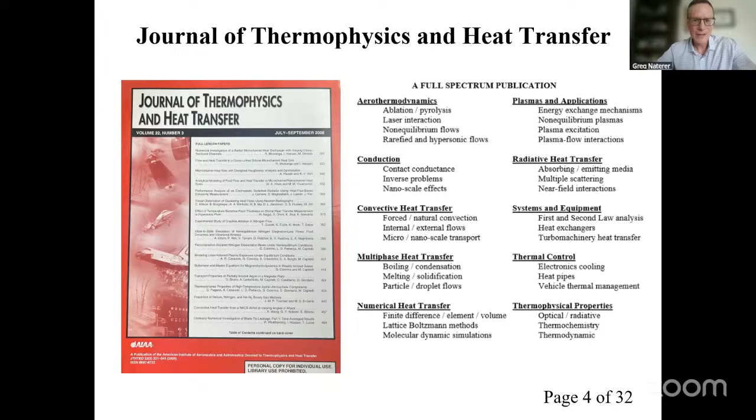Okay, moving on to hydrogen. Hydrogen is a promising clean energy carrier of the future and a potentially major solution to the world's problems of climate change and greenhouse gas warming. It can be produced in a clean manner, and when done so, its combustion produces no CO2, just water vapor.

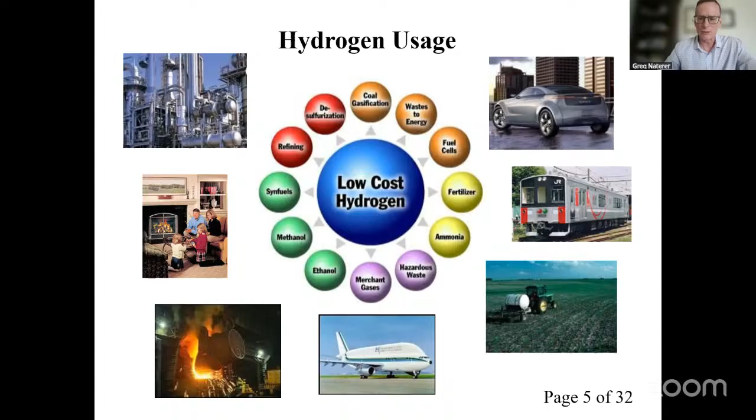So how is hydrogen produced in the world today? Hydrogen doesn't exist naturally in nature the way fossil fuels do, so it needs to be produced or manufactured somehow.

What are the primary sources of hydrogen? Well, there's two. One is that hydrogen is contained within fossil fuels like natural gas, coal, and others, so one of the primary technologies in the world now for producing hydrogen is reformation of fossil fuels like natural gas.

That accounts for 96% of hydrogen production in the world, but it has some disadvantages, including air pollution, CO2 emissions, and the potential future of increasing carbon taxes and the costs of sequestration.

Another alternative is electrolysis, which produces hydrogen instead from water. There's an abundance of water that we have, but a disadvantage with electrolysis is that it has lower efficiency and higher costs because it's using electricity to split the water.

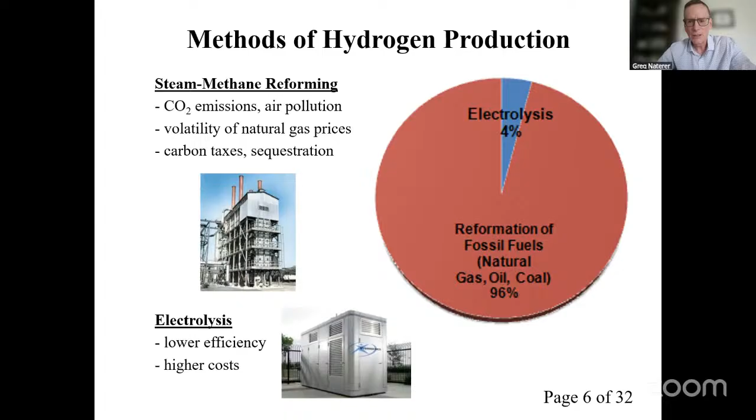Are there any other alternatives that are promising at large scale and lower costs? Well, potentially. I'm going to go through some slides quickly here on some research that myself and my team have done over the years. If you have any questions as we go along, please don't hesitate to interrupt.

Solar energy with the use of photocatalysts and water is a promising technology being developed at the laboratory scale. Essentially, photocatalysts, which are like nanoparticles immersed in water, can absorb sunlight and through that absorption process generate a reaction that splits the water into hydrogen and oxygen.

I'm working from home today, so I apologize if you hear a dog barking in the background. He's been misbehaving lately, so just please ignore that.

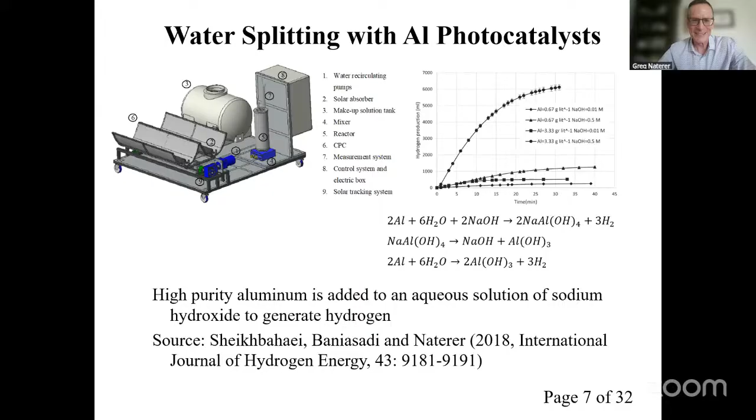Another method of water splitting is thermochemical processes. If we consider splitting water to produce hydrogen and oxygen directly, it requires very high temperatures, thousands of degrees Celsius, which is impractical, difficult to obtain such high temperature heat sources, and rather inefficient. So another promising technology is the use of intermediate chemical compounds that reduce the temperature and can split the water at low temperatures while recycling all of those intermediate compounds.

Two examples are the sulfur-based cycle and the copper-chlorine cycle. These are being developed largely in connection with next-generation nuclear reactors that will produce both hydrogen and electricity. The sulfur-based cycle has been developed extensively, including at the pilot plant level in Japan and some other countries. Its disadvantage is the very high temperature it requires, about 850 degrees.

An alternative, which is a uniquely Canadian technology, is called the copper-chlorine cycle. I'm going to talk about this now for the next little while. I led an international team in partnership with Canadian Nuclear Labs on the development of this thermochemical process.

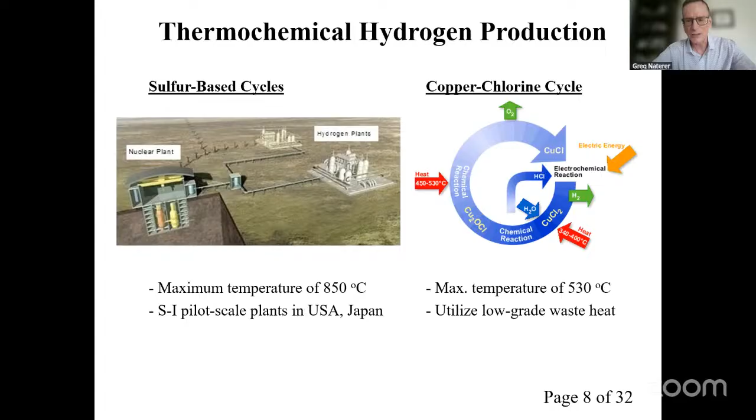If temperatures available are not high enough to supply the cycle with a maximum temperature of 530 degrees, there is a technology called chemical heat pumps, which can use waste heat from industrial or other sources and be boosted up to higher temperatures through a sequence of endothermic and exothermic reactions. These are called chemical heat pumps.

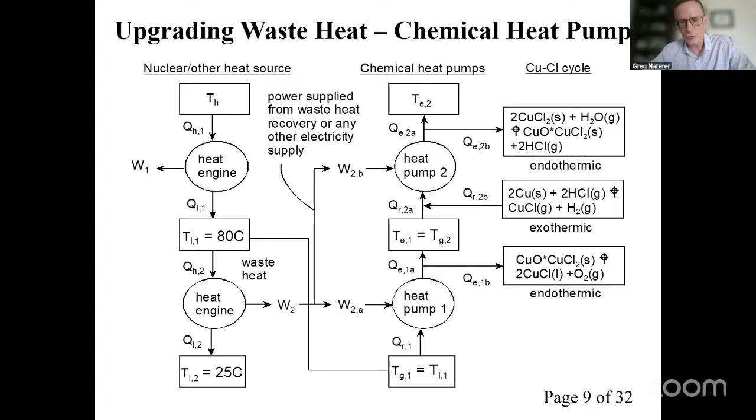They are similar to regular heat pumps and refrigeration cycles that we know about, except that rather than pressure volume changes, they use chemical reactions that elevate the temperature of the process.

I'm going to go through several slides now that show what we've developed. Our team, a few years ago, in collaboration with Ontario Tech University, Canadian Nuclear Labs, and others, developed the world's first large-scale demonstration of these unit operations, and in fact, an integrated cycle as well.

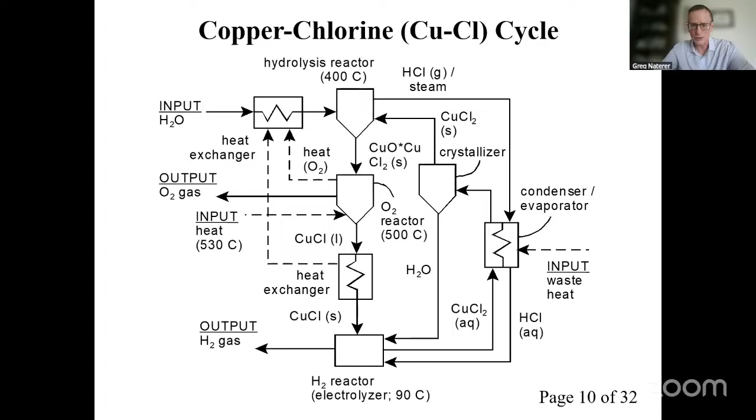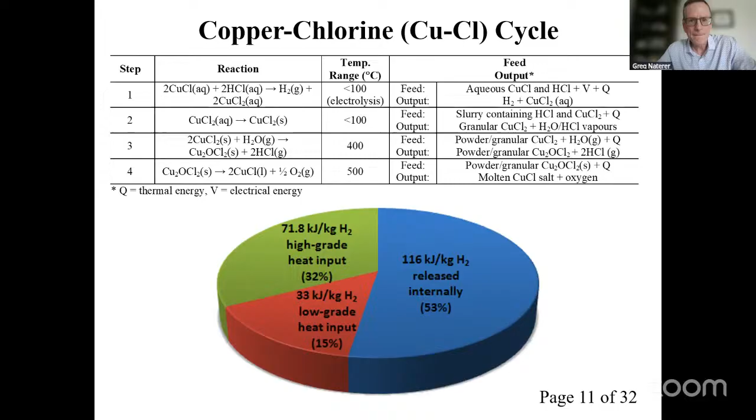Again, the four processes are shown here, and I'm just showing the portions of heat input to the cycle, and an integrated cycle that was developed in the laboratory, showing the different components. Essentially, again, just to repeat, the only input to this process is water and some electricity, and the outputs are hydrogen and oxygen.

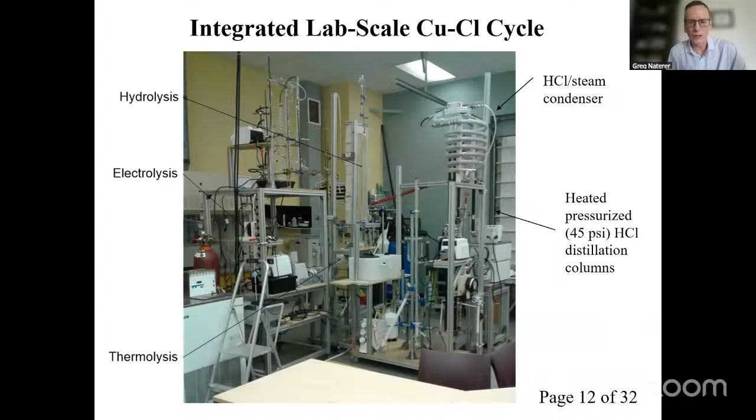This is a conceptual layout of the integrated cycle from the previous slide. Just a couple of highlights of it: it's an integration of thermolysis and hydrolysis units that produces 50 liters per hour of hydrogen.

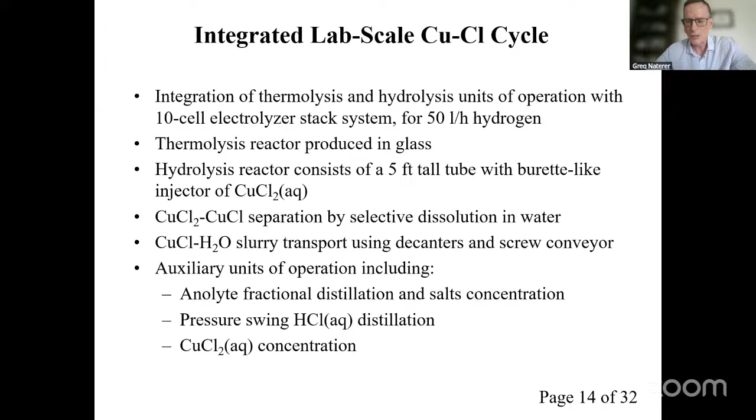The hydrolysis reactor consists of a 5-foot tall tube with a burette-like injector of copper chloride 2, separation by selective dissolution in water, and auxiliary units that perform the fractional distillation and pressure swing processes within this cycle.

I'm going to go through each of the processes. There's a copper chloride HCl electrolysis process that requires much less electricity than water electrolysis. This is one of the steps in the hybrid cycle. These are results produced from our industry partner, Canadian Nuclear Laboratories, showing continuous operation of the electrolyzer over many hours.

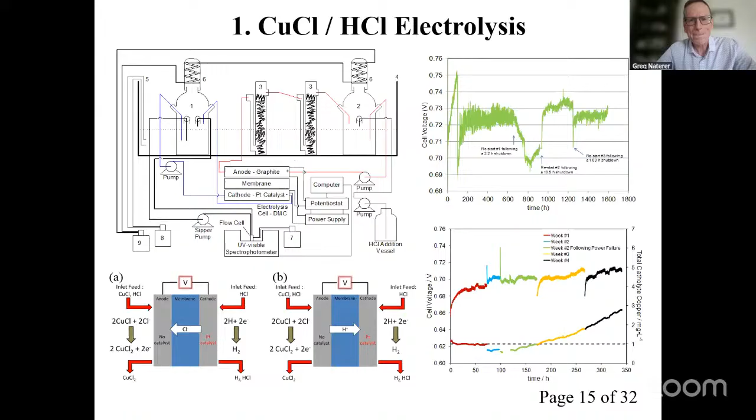Following the electrolysis process, there needs to be a separation of the water from the copper chloride 2, so a crystallization process is done there. This is showing some images and schematic of the process. It's a binary system at saturation. 20% of the CuCl2 can be crystallized in a matter of hours, and these dendritic crystals are formed in the range of 0.1 to 6 centimeters.

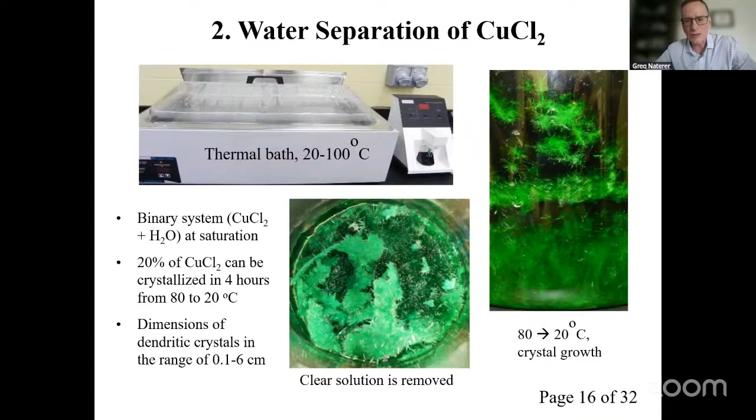This slide shows the sequential steps of crystallization from the point where it initially appears, growing denser after the solution is removed and after crystals are squeezed.

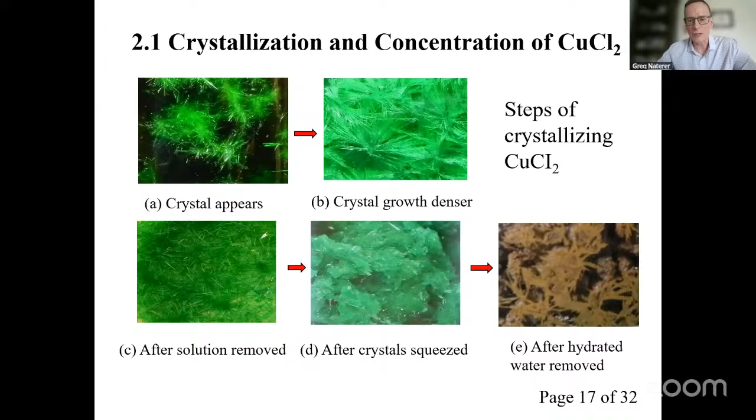This water needs to be removed because these crystals are then transported as feedstock for the hydrolysis reaction, which is the intermediate step that reacts with steam to produce copper oxychloride, one of the 4 steps I mentioned.

Alternatively to crystallization, it is possible to do a drying process, and this is an experimental facility that did this. This is spray drying of the copper 2 chloride solution, where the slurry progressively dries. You see here the stages for surface drying: a crust is formed, bubble nucleation, the crust is collected, and there's a final solid particle at the end of the spray drying process.

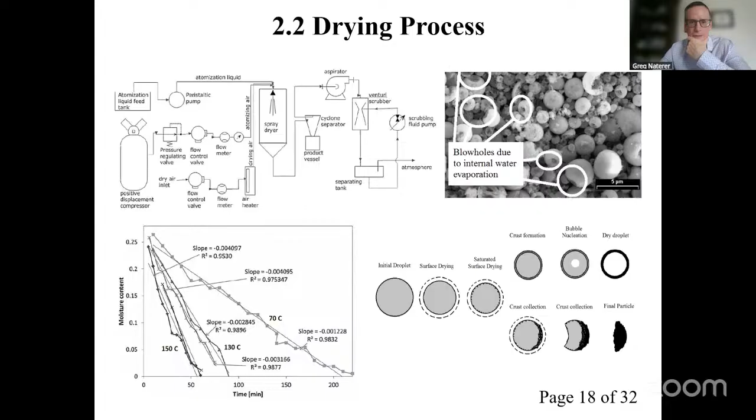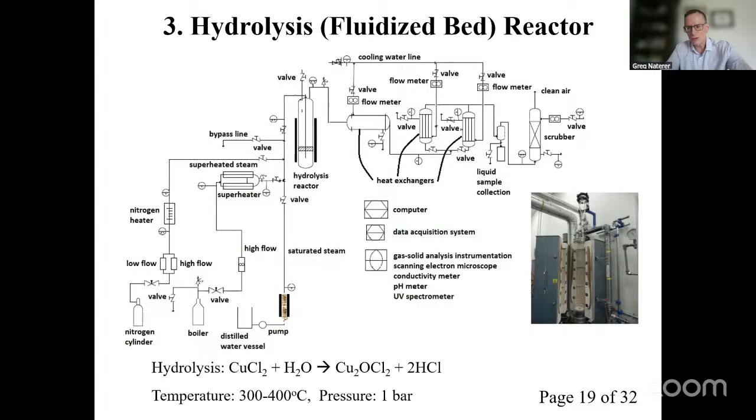Hydrolysis is the process where these dried particles are then injected. This is the experimental setup here. For each of these slides, I can provide references to journal papers. This is work done with Dr. Kevin Pope and myself during his PhD thesis on demonstration of the hydrolysis process.

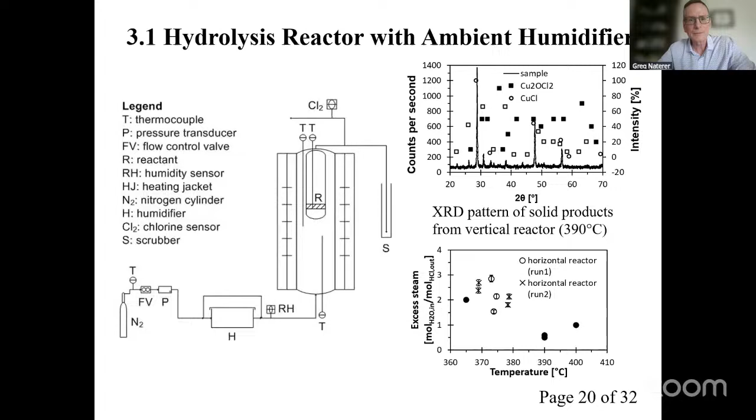One of the challenges with the cycle is that there are side reactions and byproducts that need to be handled. When the HCl and steam mixture exits the hydrolysis reactor, those two need to be separated, and this is done by means of partial condensation and recycling of the products. There's actually an azeotrope that happens for this particular mixture, which makes it more difficult.

So the condensation needs to be done in several sequential steps, as shown in this figure, and experimental work was also done in this process to demonstrate the separation of the two.

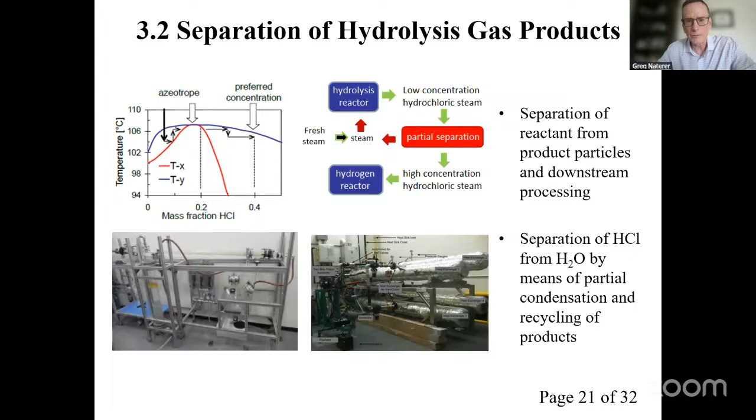Then there is thermolysis - I think this is the last one I'm going to show. This process takes the product from the hydrolysis reaction, copper oxychloride. It then decomposes in a molten copper chloride salt and releases oxygen, and the liquid that is produced, the copper chloride, is cooled and goes back to the electrolyzer to complete the cycle.

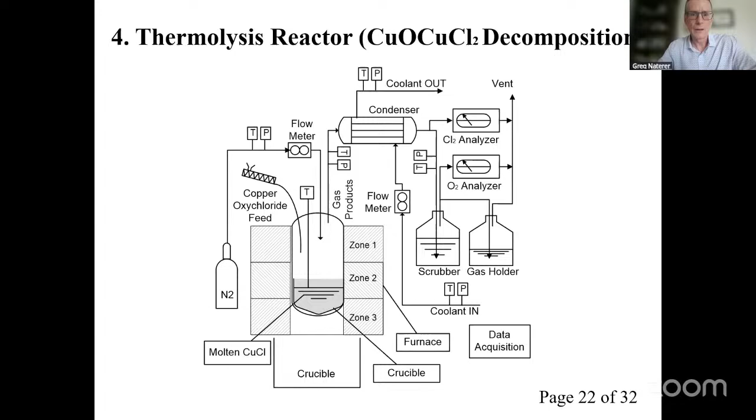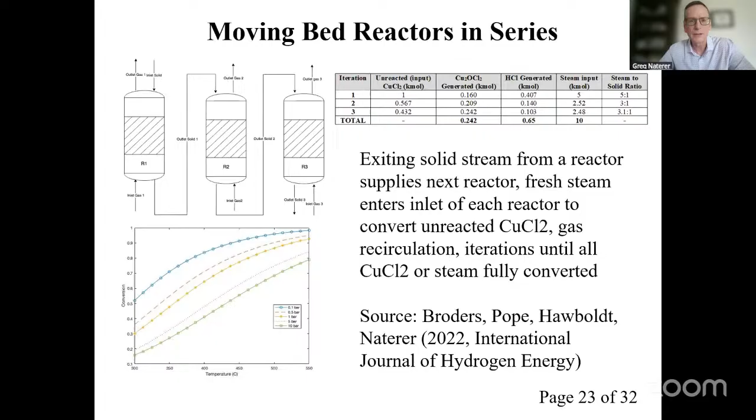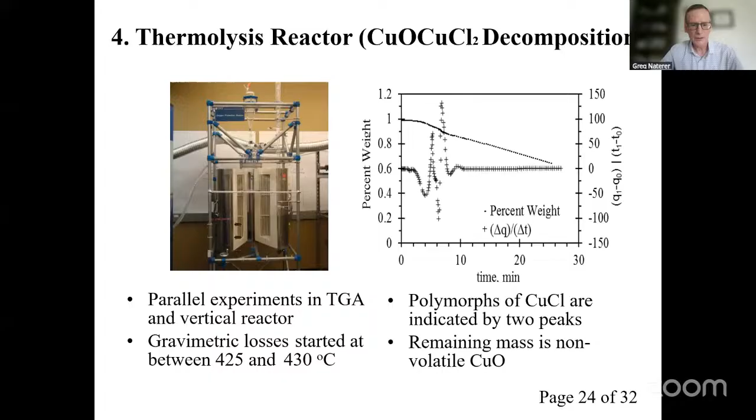This is just a schematic of the thermolysis reactor. It's a tube furnace, as you can see here, where a crucible and the molten salt are placed, and the solid is decomposed.

Some modeling and analysis was done of this process. Here we have a solid particle decomposing in a molten salt that releases oxygen gas. There's a lot of complicated transport phenomena going on here: an outward moving phase interface, oxygen bubbles that are produced, and thermal resistance that dominates the phenomena.

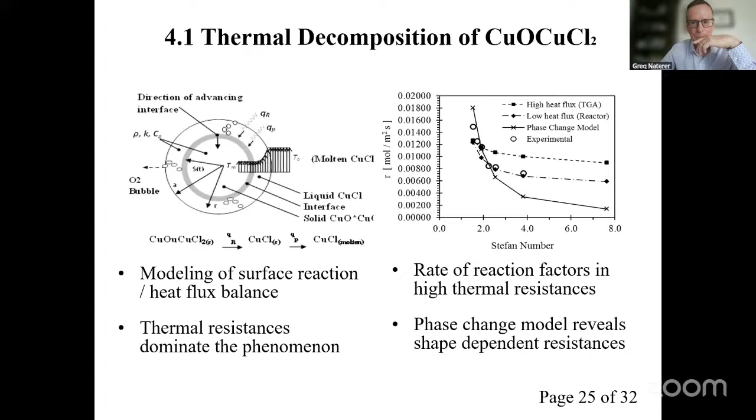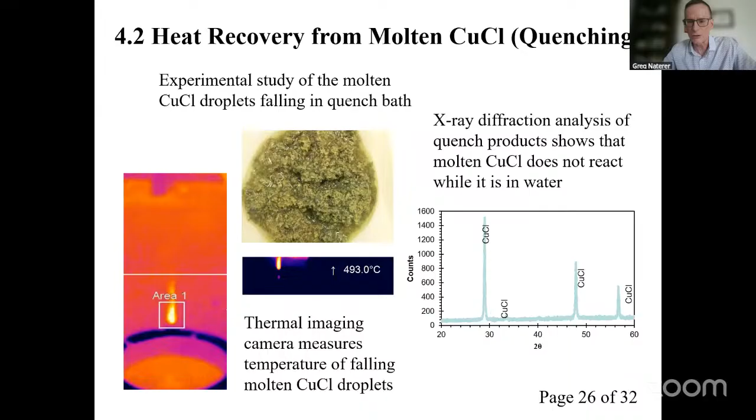Once the molten salt is produced from the thermolysis, we need to recover heat to uphold the thermal efficiency of the cycle. This study shows heat recovery from molten CuCl droplets falling in a quench bath, as well as X-ray diffraction of the quench product, showing that the molten CuCl does not react while it's in the water.

Okay, that's it for the copper chlorine cycle. What is the future vision for this? Well, colleagues and myself have been actively seeking out future industrial receptors to further scale up this technology to an industrial pilot plant. That's what has happened here: small test tubes have demonstrated the viability of the cycle at a very small scale.

This was done originally by the Argonne National Lab in the United States in the early 2000s. Since that time, my team and I have developed large-scale lab engineering equipment at the scale of about 5 kilograms per day. And the testing continues, and the research is ongoing.

The next stage is that we are aiming to partner with an industry receptor, such as one that produces waste heat at high temperatures, like a steel plant or a cement plant or other heavy chemical production or furnace companies that have high temperature furnaces that release waste heat, to utilize that waste heat and produce a pilot plant.

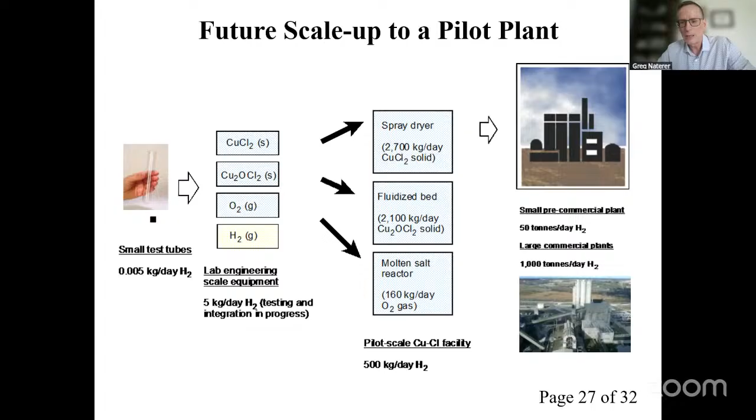After a pilot plant is demonstrated, then the next would be large commercial plants that in the future could potentially be linked with nuclear plants or with solar plants or other industrial manufacturing facilities.

This is just a schematic showing how the cycle could be linked with a nuclear power plant with the 4 steps in the cycle. Really the connection is input heat through an intermediate heat exchanger between a nuclear plant and a hydrogen plant, carrying heat in the form of high temperature steam that supplies the thermolysis reactor.

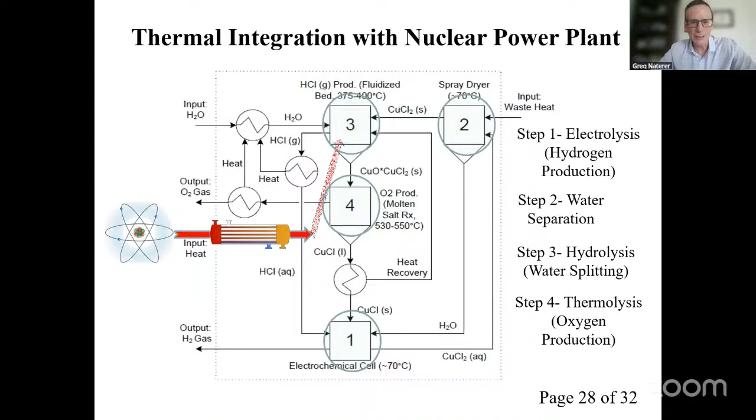Also, waste heat from the nuclear power plant can be used towards the first and second steps, particularly the water separation. So that's again a unique advantage of this cycle that can utilize waste heat.

So hydrogen as a storage medium for nuclear energy, when there are daily price fluctuations based on supply and demand of electricity. During periods of low demand and low price, a potential option for power plants is the storage of that electricity in the form of hydrogen.

Also, for renewable energy like wind and solar, at times when the wind is not blowing and the sun is not shining, there needs to be energy storage to have a more consistent power output. Hydrogen is a potentially promising form of energy storage that can store electricity during periods of low demand and price, and then convert it back to electricity via fuel cells or direct combustion engines when demand is high. So hydrogen storage would be a promising way to address intermittency of wind and solar energy.